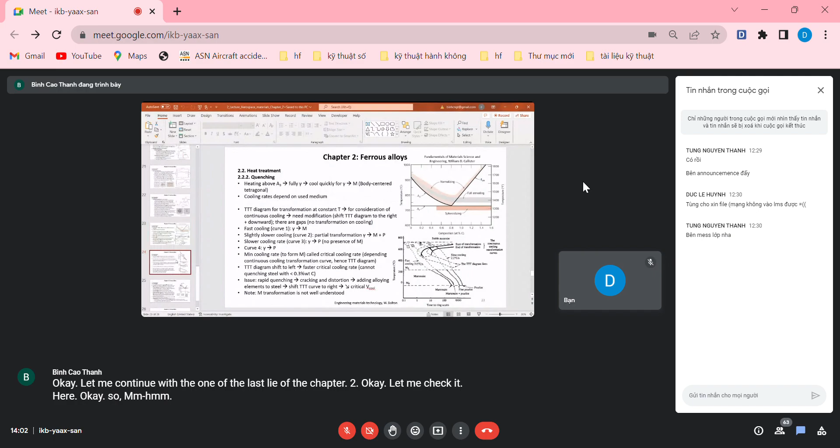Quenching, tempering, and carburizing. Carburizing, in Vietnamese, thấm carbon. The purpose of performing carburizing is to improve the carbon content of the surface layer, together with supporting the quenching process in order to form the martensite on the surface layer.

The reason is that for steel with carbon content smaller than 0.2%, there is no possibility to quench. Therefore, the idea is to create steel structures so that in the core of the material it is soft, has good ductility and a large percentage elongation.

However, on the surface, they would like to have something hard, with high hardness and the ability to withstand scratch and wear. In such a case, they apply carburizing for steel with smaller than 0.2% of carbon. After carburizing, the carbon content on the surface layer can reach 0.7 up to 0.8%, and the surface layer can be quenched to form martensite structures, which can significantly improve the wear resistance and strength of the surface layer.

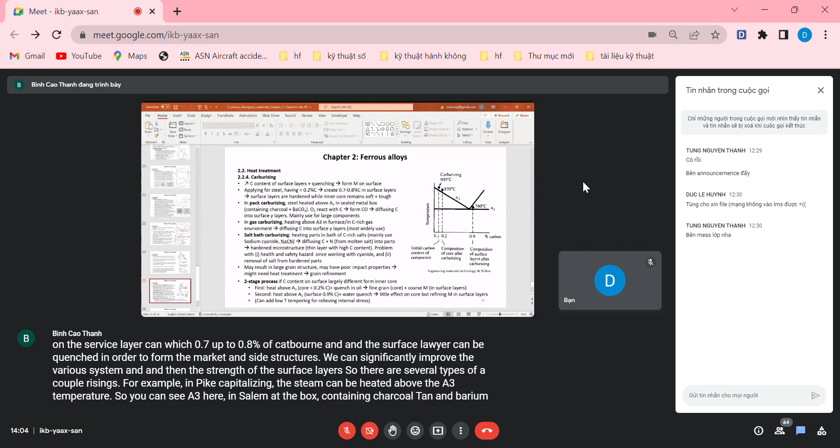So there are several types of carburizing. For example, in pack carburizing, the steel is heated above the A3 temperature, in a sealed metal box containing charcoal and barium carbonate. The oxygen reacts with the carbon to form carbon monoxide, which then diffuses carbon into the surface austenite layer.

This can be used for enhancing the carbon content on the surface layer of large components. Regarding gas carburizing, you heat the materials with steel having smaller than 0.2% of carbon above A3 temperature in furnaces or in a carbon-rich gas environment to promote the diffusion of carbon into the surface austenite layers.

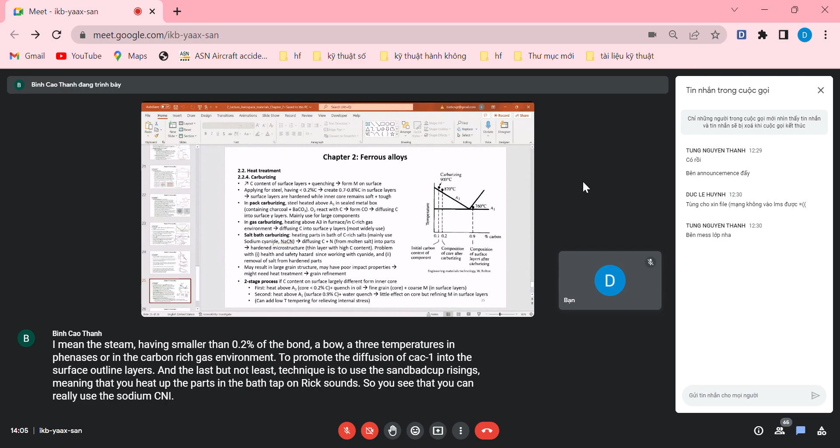The last technique is salt bath carburizing, meaning you heat the part in a bath of carbon-rich salts. You mainly use sodium cyanide, which is quite detrimental to human health, in order to promote the diffusion of carbon and nitrogen from the molten salt into the part, giving the positive effect of hardened microstructures with a thin layer of high carbon content. However, remember that you work with the cyanide group, so it's quite terrible for health, and you need to consider the safety hazards of working with cyanide.

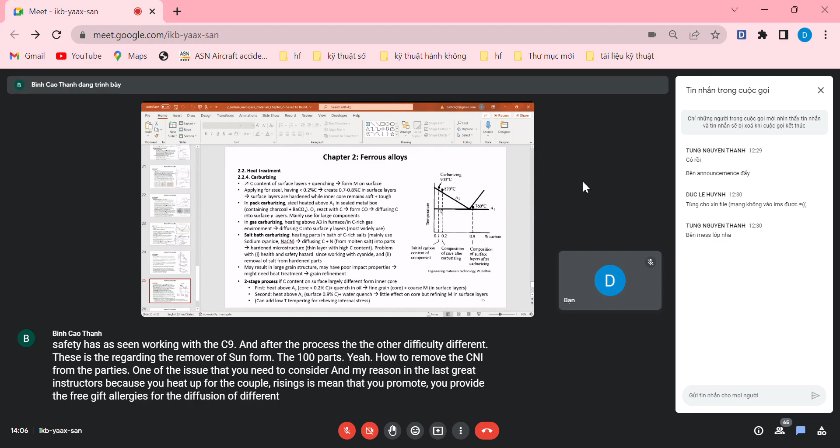After the process, another difficulty is the removal of salt from the hardened parts—how to remove the cyanide is one issue to consider. It may also result in large grain structures because heating for carburizing provides free energy for diffusion of different atoms, promoting grain growth and reducing the strength of the material. As a result, you may have poor impact properties, and you need additional heat treatment to refine the grains.

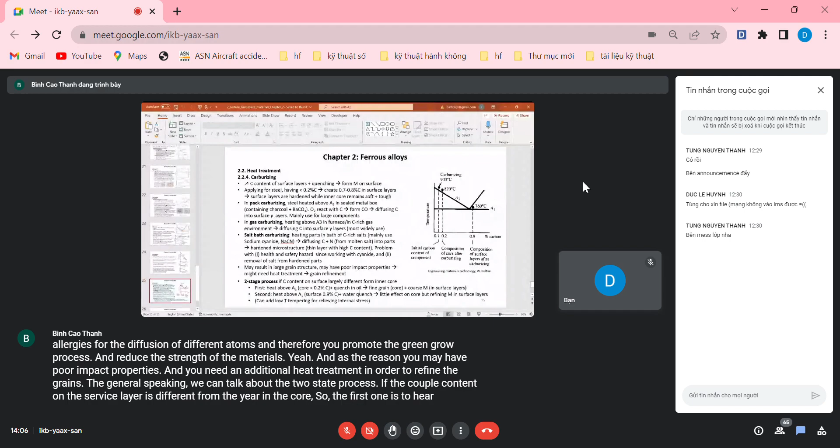Generally speaking, we can talk about a two-stage process, if the carbon content on the surface layer is different from the inner core. The first stage is to heat up above the A3 temperature. Remember that the A3 temperature is a line, and the specific temperature depends on the specific composition, or the amount of carbon content, so you have to consider the specific temperature.

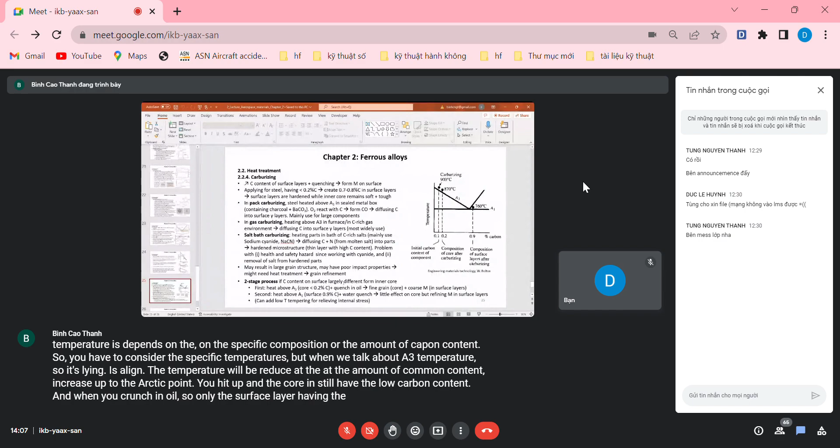The temperature will be reduced as the amount of carbon content increases up to the eutectoid point. You heat up, and the core will still have low carbon content. When you quench in oil, only the surface layer can be quenched, because it has carbon content larger than 0.3%—after carburizing, the carbon content on the surface layer can reach 0.7 up to 0.8% by weight.

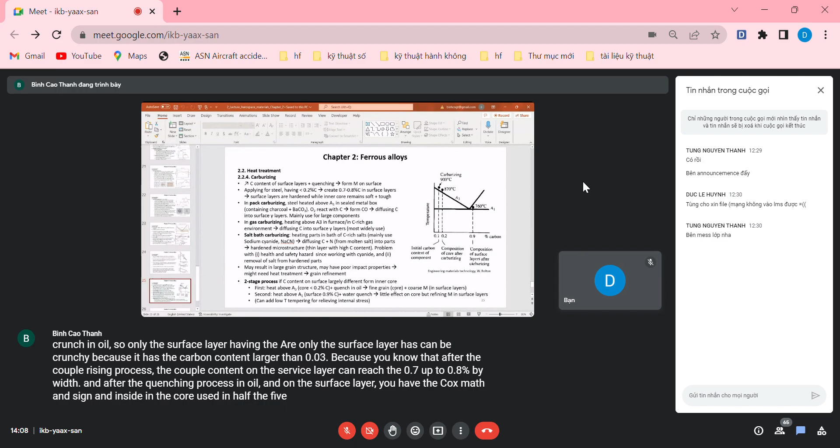After quenching in oil, the surface layer has coarse martensite, while inside the core you still have fine grain, because we do not quench the core. In the second stage, you heat up above the A1 temperature.

Because if you perform the carburizing and enhance the carbon content up to 0.9%, it means that after the eutectoid point, or hypereutectoid steel, in that case you just heat up above A1 and perform the water quenching process in order to refine the martensite on the surface layer. Afterward, you can perform the tempering process for relieving the internal stress. So that's what we can do with the carburizing process.

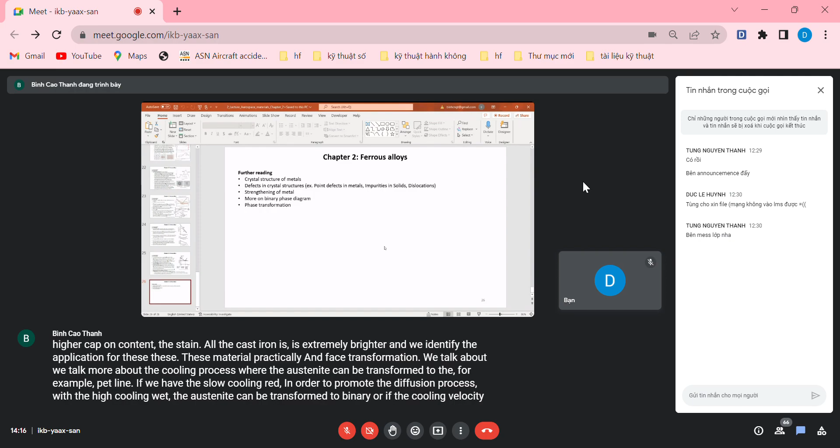And phase transformation - we talked more about the cooling process, where austenite can be transformed to, for example, pearlite, if we have a slow cooling rate in order to promote the diffusion process. With a high cooling rate, austenite can be transformed to bainite, or if the cooling rate is higher than the critical cooling rate, then we have transformation from austenite to martensite. Please remember, this process is not complete, and you have some kind of residual austenite after the transformation. Together with different kinds of heat treatment, we also talked about carburizing or nitriding, but nitriding was not mentioned here.

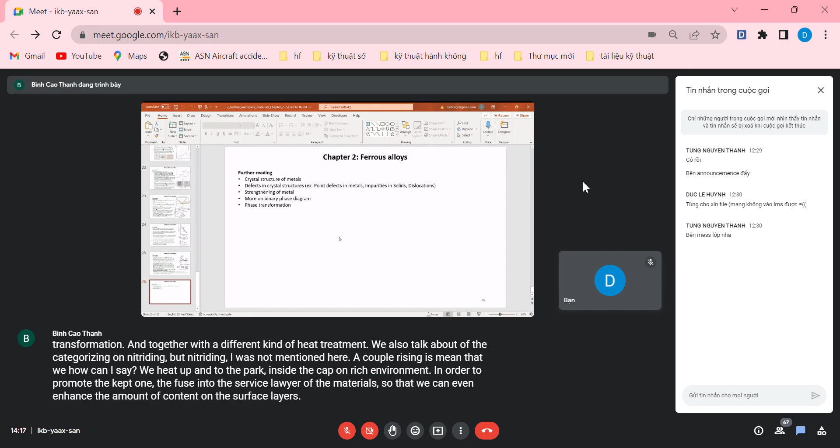Carburizing means we heat up the part inside a carbon-rich environment in order to promote carbon diffusion into the surface layer of the materials, so that we can enhance the amount of carbon content on the surface layers. In doing this, the surface layer has a high amount of carbon content, and generally speaking, is harder than the inner core of the material. So the surface part can resist wear well, wear resistant and scratch resistant, but the inner core is relatively ductile and has great percentage elongation and can withstand the impact load well.

Yeah, that's the point. Okay, so now I would like to stop the second chapter. If you do not have any other questions concerning the ferrous alloys, we can turn into the third chapter, where we will focus on non-ferrous alloys, for example copper alloy, aluminum alloy, nickel alloy, titanium alloy, and others.

Where is it? Sorry for all the edit.

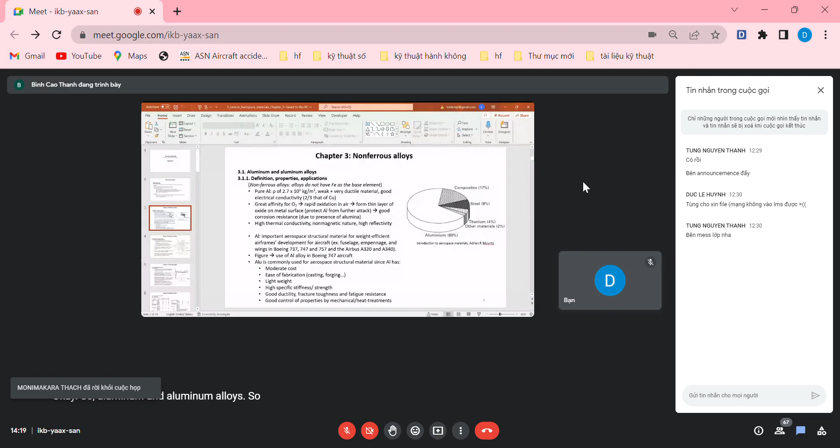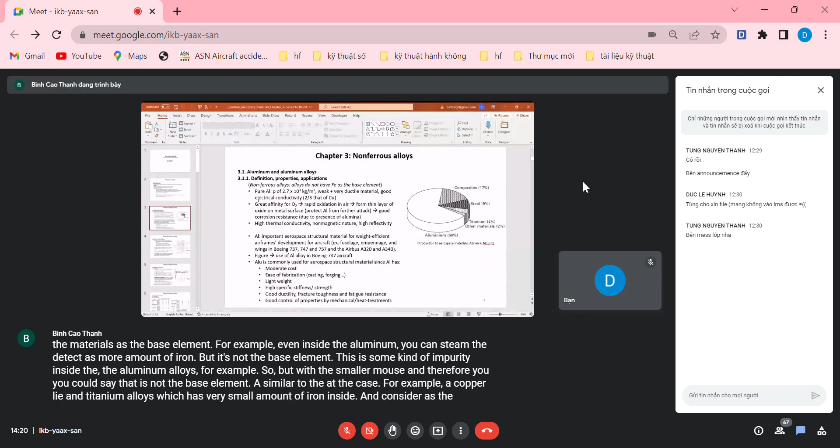So, aluminum and aluminum alloys. I think this is a popular material that almost all of you are familiar with, and we also study it in high school. When we talk about non-ferrous alloys, it means those alloys which do not contain iron as the base element. For example, even inside aluminum you can detect a small amount of iron, but it's not the base element, just some kind of impurity. Similarly, copper alloys and titanium alloys have a very small amount of iron, considered as impurities, not as the base element.

Concerning pure aluminum, the density is around 2.7 times 10 to the 3 kilograms per meter cubed. Aluminum is weak, very ductile material, and has very good electric and thermal conductivities. The electric conductivity of aluminum is equal to two-thirds that of copper.

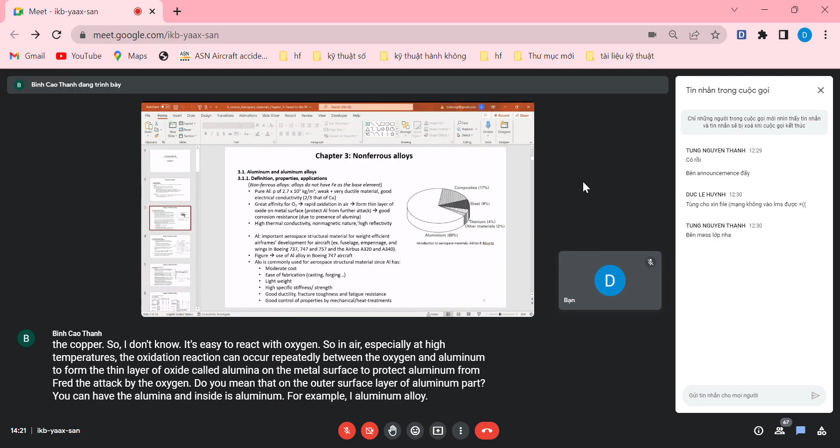Aluminum is easy to react with oxygen. In air, especially at high temperatures, the oxidation reaction can occur rapidly between oxygen and aluminum to form a thin layer of oxide called alumina on the metal surface, protecting the aluminum from further attack by oxygen. This means that on the outer surface layer of an aluminum part, you will have alumina, and inside is aluminum or aluminum alloy. So on the outside surface you have alumina, showing very good corrosion resistance.

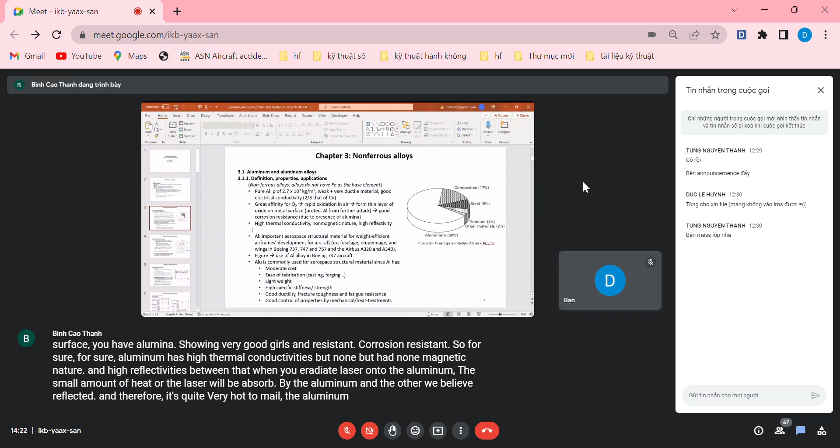Very good corrosion resistance. Aluminum has high thermal conductivity but has non-magnetic nature and high reflectivity, which means that when you irradiate a laser onto aluminum, a small amount of heat or laser will be absorbed and the rest will be reflected. Therefore it's quite hard to melt the aluminum material by laser because of high reflectivity, and that's one of the reasons it's a little difficult to sinter or additively manufacture aluminum alloys by additive manufacturing.

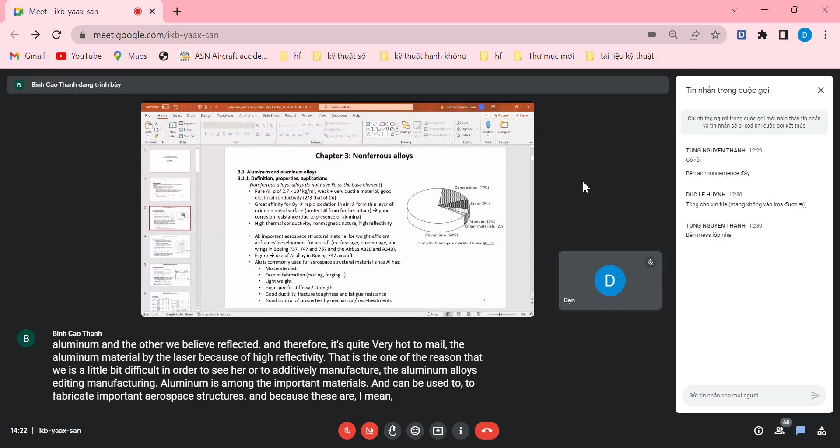Aluminum is among the important materials and can be used to fabricate important aerospace structures. I mean, not pure aluminum, but aluminum alloy, because it's light and has very good strength. This can be used to fabricate, for example, fuselage, empennage, and wings in Boeing 737, 747, 757, or the Airbus - quite famous airplanes, Airbus A320 or A340.

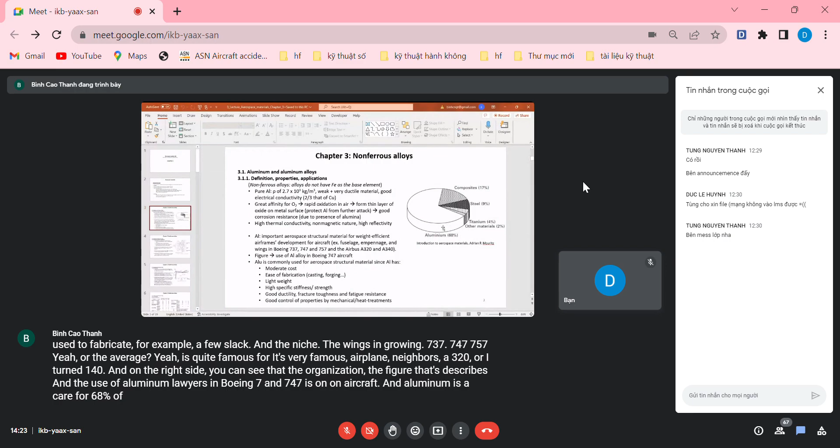On the right side you can see the figure describing the use of aluminum alloys in the Boeing 747 aircraft. Aluminum accounts for 68% of material on this aircraft. Composite accounts for just 17%, but now composite has increased up to 50%.

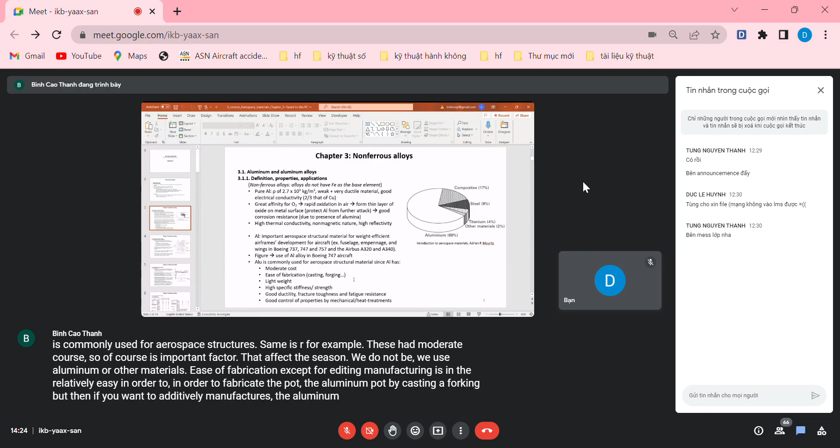The reasons aluminum is commonly used for aerospace structures are, for example, moderate cost - cost is an important factor affecting the decision of whether to use aluminum or other materials - and ease of fabrication, except for additive manufacturing. It can be relatively easy to fabricate aluminum parts by casting or forging, but if you want to additively manufacture an aluminum part, it's a little more difficult compared to other materials, since aluminum has high reflectivity.

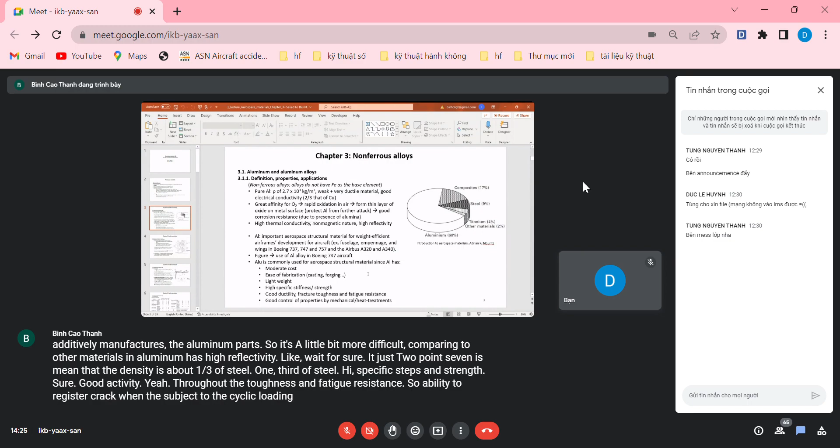Lightweight for sure - a density of 2.7 means it's about one third of steel. High specific stiffness and strength, good ductility, fracture toughness, and fatigue resistance - the ability to resist cracking when subjected to cyclic loading. And good control of properties by mechanical or heat treatment. With the development of technologies, we can achieve this for many metals, not only aluminum.

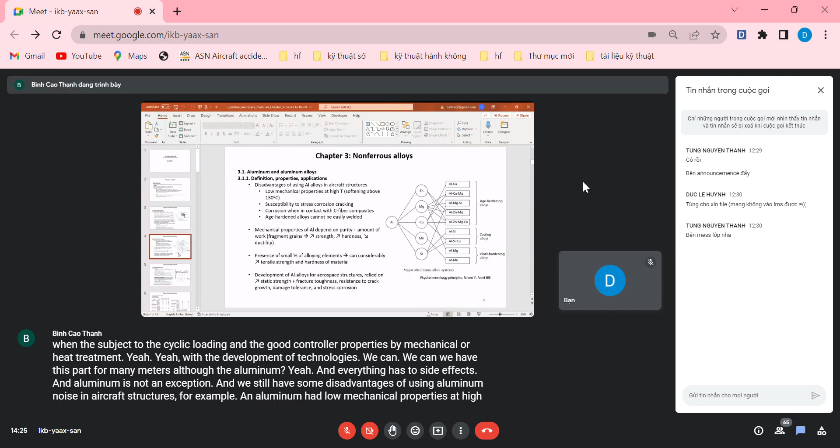And everything has two side effects, and aluminum is not an exception. We still have some disadvantages of using aluminum alloys in aircraft structures. For example, aluminum has low mechanical properties at high temperatures, because at high temperatures it can be softened, especially above 150 degrees C. Aluminum is also susceptible to stress corrosion cracking.

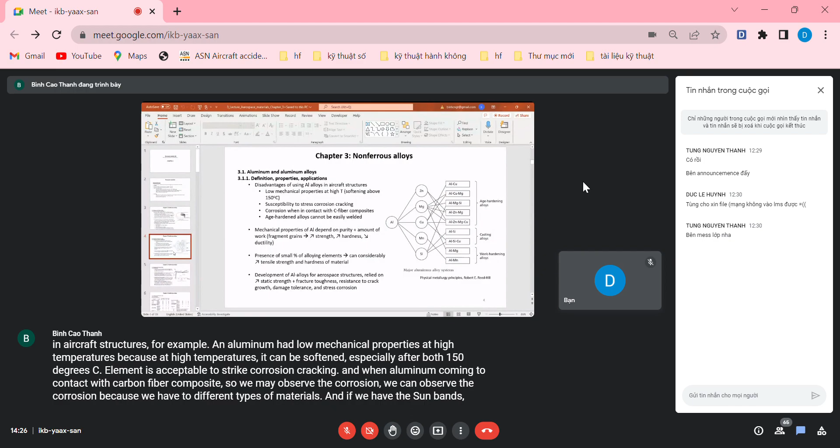When aluminum comes into contact with carbon fiber composite, we may observe corrosion, because we have two different types of materials. If we have solvents containing ions of two different metals, it can promote the corrosion process.

Age hardened alloy cannot easily be welded - these are the physical properties. But now we have different joining processes, not only welding processes, in order to join materials together. But generally speaking, this is one of the disadvantages of using aluminum alloys in aircraft structures - not easy to be welded, especially for age hardened alloys.

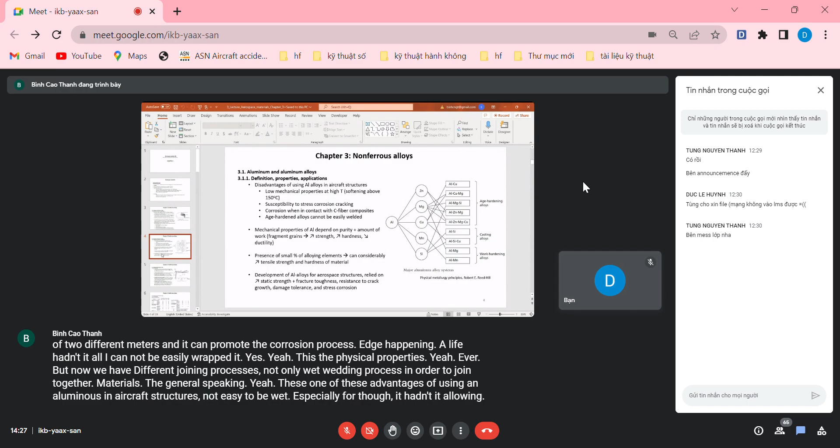So regarding aluminum alloys, you see that aluminum can be alloyed with different metals, for example zinc, magnesium, copper. Aluminum-copper is quite famous, age hardening alloys.

For example, as a part inside the ferrous alloy steel, we have talked about precipitation hardening. I took one example, not regarding steel, but precipitation hardening, showing you the aluminum alloy with 4% of copper.

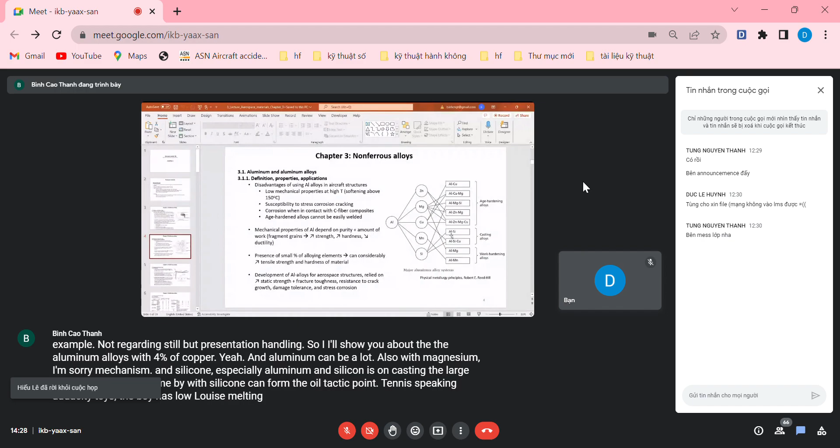Aluminum can also be alloyed with magnesium, manganese, and silicon. Especially aluminum and silicon is called casting alloy because aluminum combined with silicon can form the eutectic point. Generally speaking, the eutectic point is the point with lowest melting temperature, so it's very easy to cast because you need lower energy to heat up the material up to the molten state.

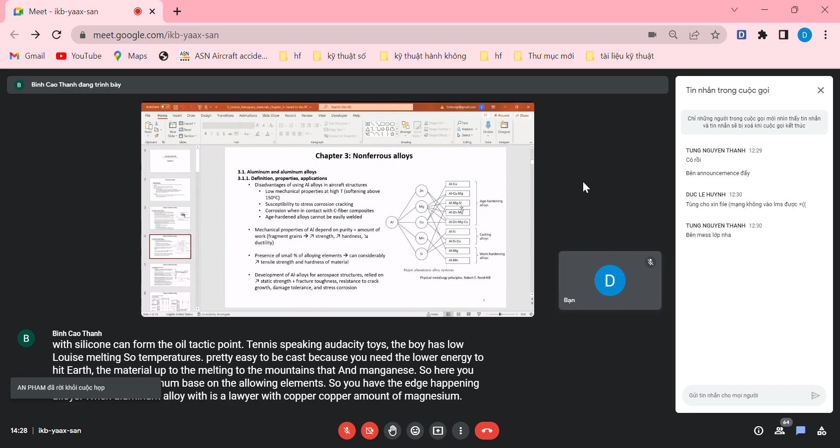And manganese. So here you can also classify aluminum based on the alloying elements. You have the age hardening alloys when aluminum is alloyed with copper, or magnesium and silicon, or zinc and magnesium, and so on. On the next few slides we will talk about the classification for aluminum and aluminum alloys.

Mechanical properties of aluminum for sure depend on purities. When impurity occurs, it really affects the mechanical properties of aluminum, but it depends on the specific alloying element.

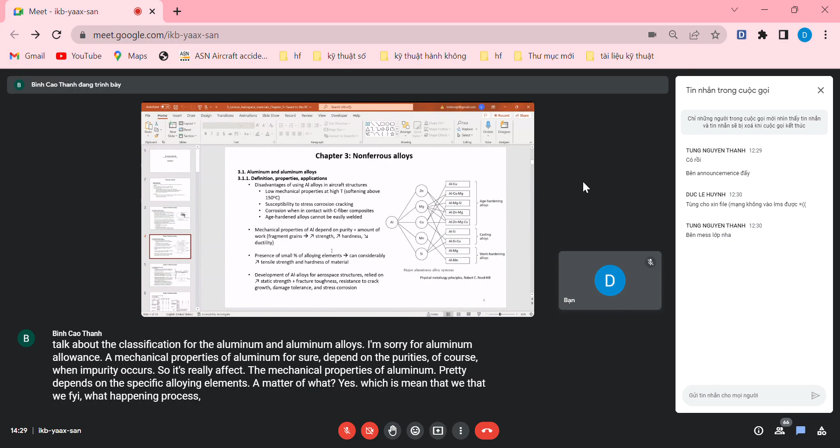Amount of work, yes - it means whether we apply the work hardening process or not. Generally speaking, once you have the work hardening process, you can break the large grain to form small grains. The number of grains is increased, meaning you have increased the grain boundary regions, and therefore you improve the strength and hardness.

But on the other side, you reduce the ductility of the material. That's why I always ask you to be careful, because you need to find the trade-off between the hardness, the strength, and the ductility.

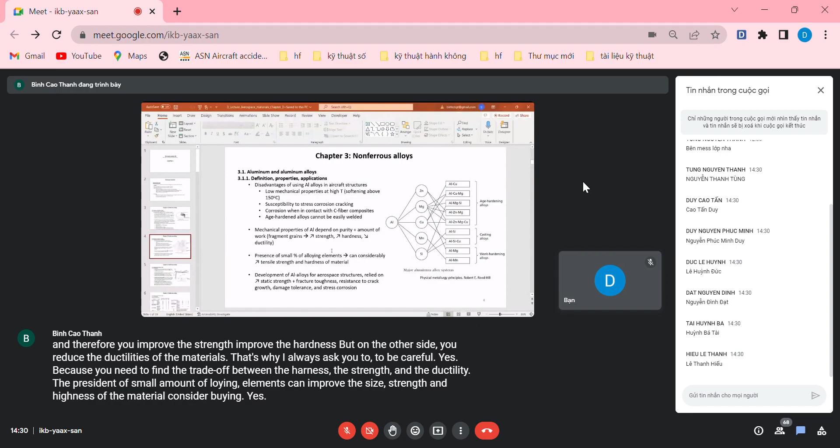The presence of a small amount of alloying elements can improve tensile strength and hardness of the material considerably. So this is the effect of adding alloying elements - even a small amount can significantly modify the properties of the material.

The development of aluminum alloys for aerospace structures relies on the strength - improvement of static strength, fracture toughness, resistance to crack growth, damage tolerance, and stress corrosion.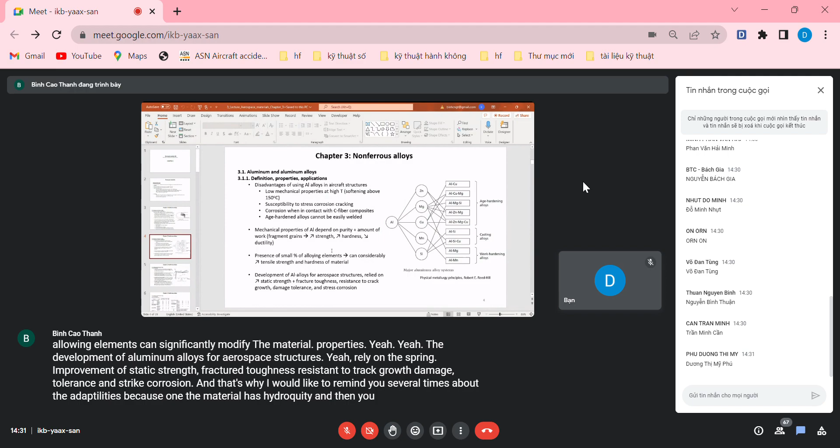That's why I would like to remind you several times about the ductility, because when the material has high ductility, you can have good damage tolerance, because when the impact force is applied to the part, the part can be deformed.

Once the airplane lands, you can change the part. So it means the part can work for a certain period of time before replacement. But if it does not have damage tolerance, it means that under the influence of the impact force, the part is suddenly broken down.

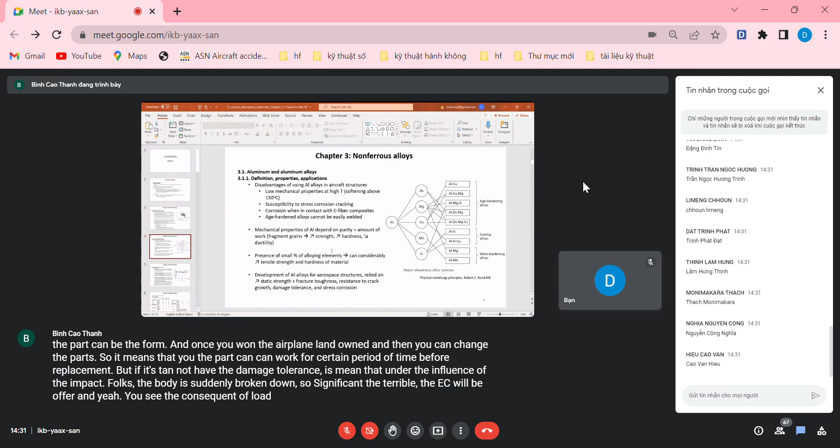A significant, terrible issue will occur. You see the consequence of low damage tolerance - fracture will occur immediately and block the engine, for example. What happens afterward? And stress corrosion.

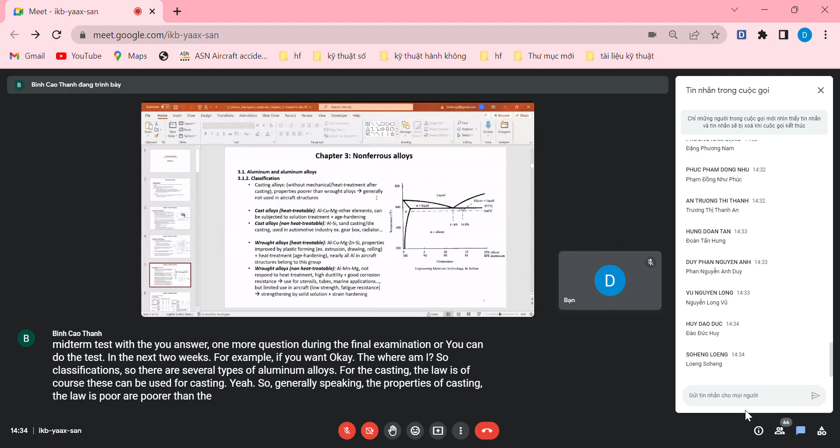So classification: there are several types of aluminum alloys. For casting alloys, these can be used for casting. Generally speaking, the properties of casting alloys are poorer than wrought alloys. We do not use aluminum casting alloy for aerospace structures because it has poorer mechanical and even chemical properties compared to wrought alloys, and poor surface quality as well. But they are grouped among the other types of aluminum alloys, so we need to know them.

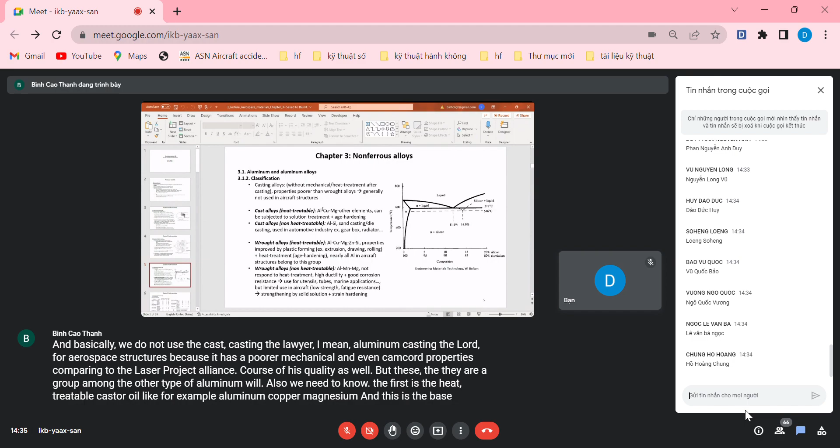The first is the heat treatable cast alloy, like aluminum, copper, magnesium, and these are the base elements. But we can add other alloying elements as well, and it can be subjected to solution treatment and age hardening.

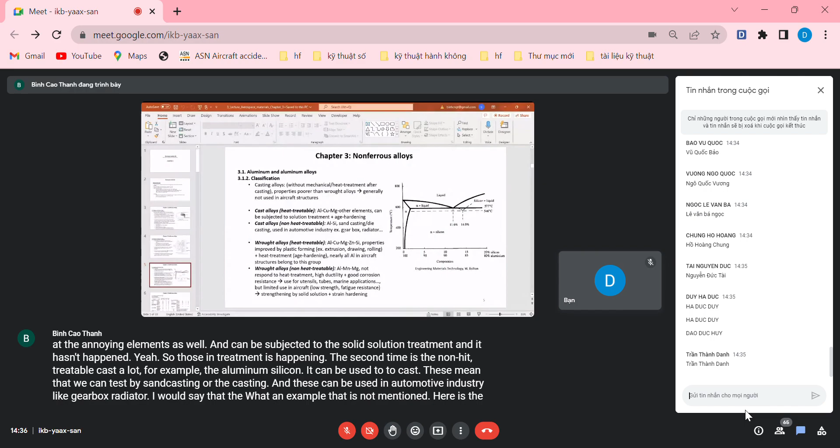The second type is the non-heat treatable cast alloy, for example aluminum silicon. It can be used to cast by sand casting or die casting, and can be used in the automotive industry like gearbox, radiators. An example not mentioned here is the piston head, which is made of aluminum silicon. Piston head, radiator (hộp tản nhiệt), gearbox (hộp số).

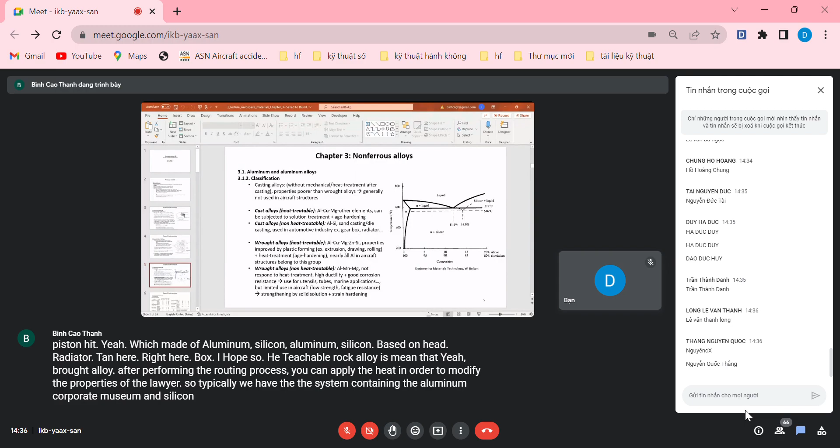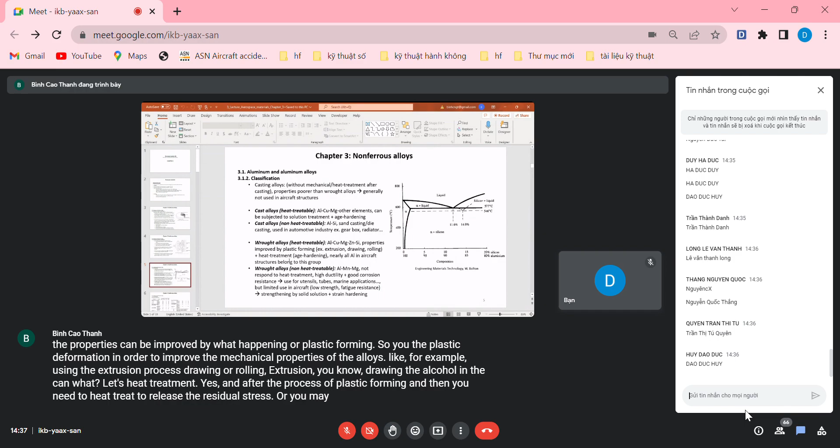The heat-treatable wrought alloy means that after performing the wrought process, you can apply heat in order to modify the properties of the alloy. Typically we have the system containing aluminum, copper, magnesium, zinc, and silicon. The properties can be improved by work hardening or plastic forming, using plastic deformation to improve mechanical properties, like extrusion, drawing, or rolling (extrusion, kéo qua, cán cuộn), plus heat treatment. After the process of plastic forming, you need to heat treat to release residual stress, or you may form precipitates to increase the strength and performance of the materials. Nearly all aluminum in aircraft structures belongs to this category, the heat treatable wrought aluminum alloy.

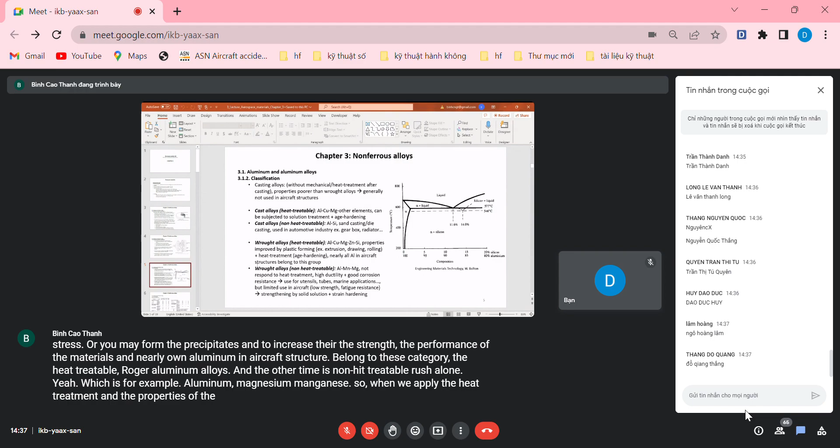The other type is non-heat treatable wrought alloy, for example aluminum, magnesium, manganese. When we apply heat treatment, the properties of the wrought aluminum alloys almost do not change. This type of alloy has high ductility, good corrosion resistance, and with these properties, non-heat treatable wrought alloys can be used for making utensils, tubes, or other marine applications.

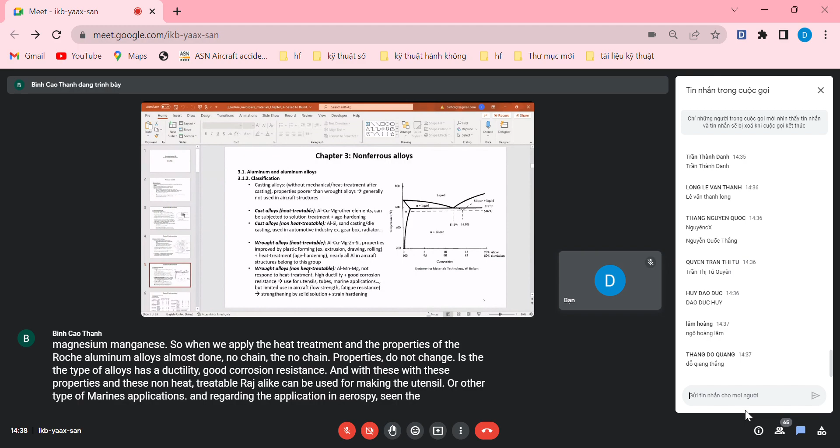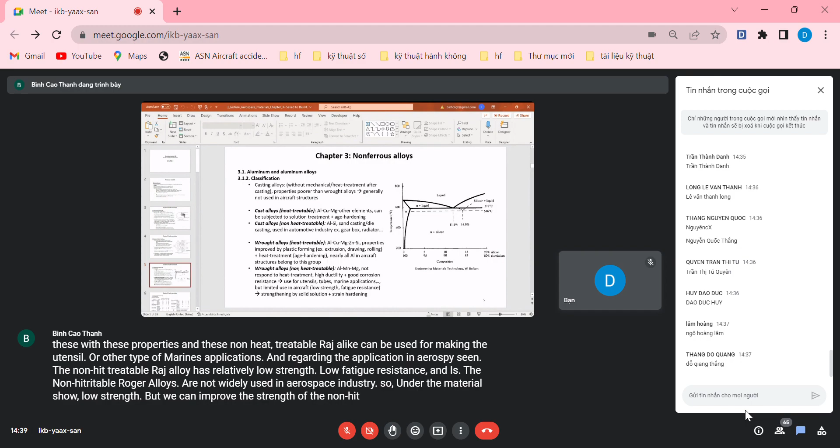Regarding application in aerospace, since the non-heat treatable wrought alloy has relatively low strength and low fatigue resistance, these alloys are not widely used in the aerospace industry. Although the material shows low strength, we can improve the strength of the non-heat treatable wrought alloy, not by heat treatment, but by solid solution strengthening or strain hardening.

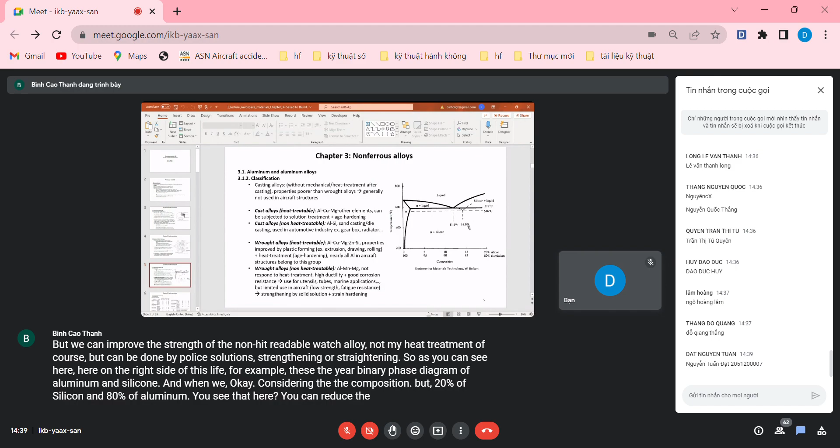As you can see on the right side of this slide, this is the binary phase diagram of aluminum and silicon. When we consider the composition of 20% silicon and 80% aluminum, you see here that you can reduce the temperature of the eutectic point, and therefore you save energy for heating the material up to the molten stage for the casting process.

This is because aluminum silicon is the cast aluminum alloy, but actually we have many cast alloys. It depends on the specific composition that can be used, for example 1% silicon, 99% aluminum, and others.

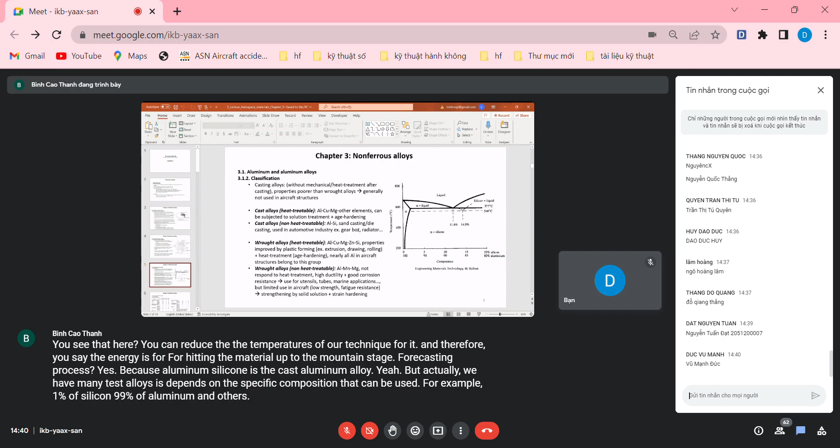So here you could see the table. I just divided the table into two parts so that it can fit into the slides. This shows the typical properties of different aluminum alloys based on the classification we have dealt with. We have the composition, the conditions - condition means different heat treatment processes can be applied in order to modify the properties, for example tensile strength, percentage elongation, or the hardness of the materials.

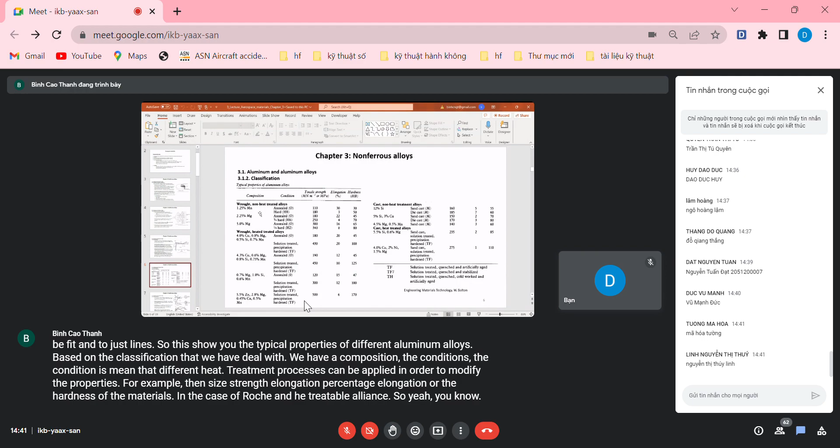In the case of wrought, non-heat treatable alloys, we alloy with manganese or magnesium with a certain composition, and we can use the anneal process. Anneal means quá trình ủ, but during the second chapter we do not focus on the annealing process for steel, but you can read it at home if you are interested.

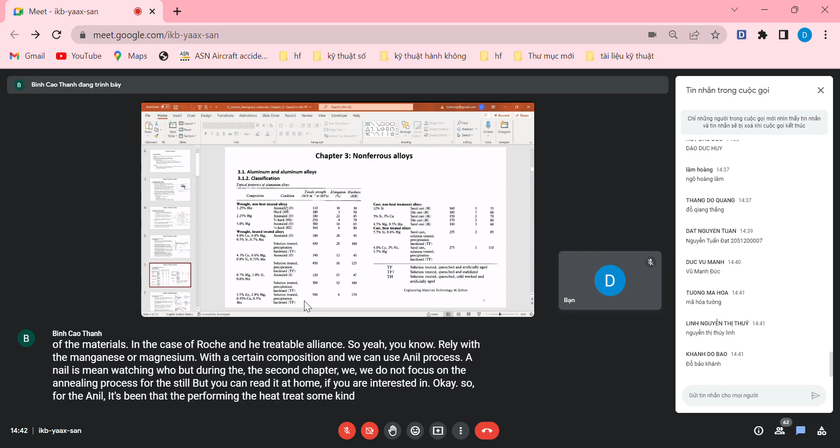So for annealing, it means you perform heat treatment, some kind of heat treatment, and you do not have a significant effect because this is a non-heat treatable alloy. It means that even if you apply heat treatment, if the strength is not improved, why should we apply it? It wastes money, time, and effort of the technician.

And hard, you can improve with H8. You can improve the tensile strength, but then you reduce the elongation percentage. That's what you need to balance.

And you can have the precipitation hardening process, which can significantly improve tensile strength. With respect to the case of non-heat treatable wrought alloy, that's why heat treated wrought aluminum can be used for the aerospace industry, because it's almost 4 times higher than the tensile strength of non-heat treated wrought alloys.

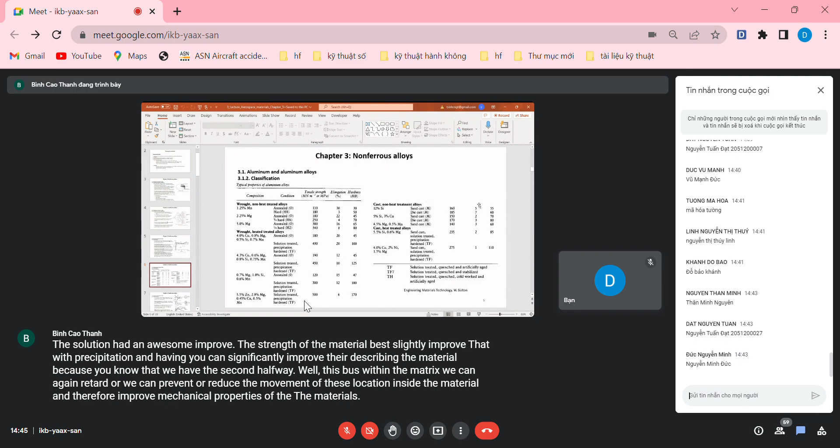You can even alloy with nickel, so 2% nickel, 4% copper, and 1.5% magnesium. It's quite interesting to know about this, because 2% nickel is not high, but this is an expensive material, so that's why I'm interested.

So let's talk a little bit more about heat treatment for aluminum and aluminum alloys. When we talk about heat treatment, we pay more attention to the group of heat treatable wrought alloys, because they can be used for the aerospace industry, and by using heat treatment we can improve the properties of these materials. So aluminum and copper, for example...

especially duralumin, with 4% copper, 0.8% magnesium, 0.5% silicon, and 0.7% manganese, with the balance being aluminum, so that we have 100% by weight of the material. This material is widely used in aircraft bodywork, and for the heat treatment there are several steps, including solution heat treatment, quenching, and aging.

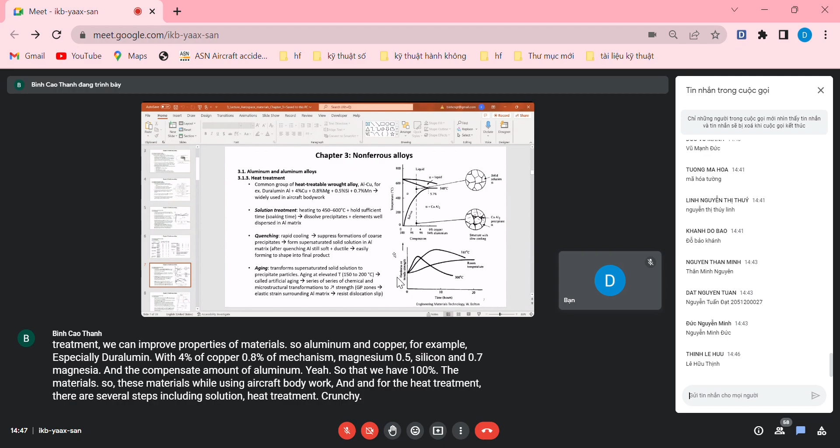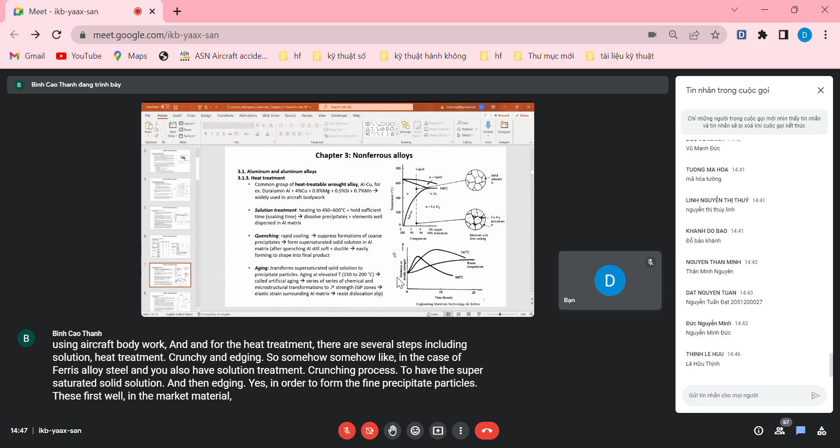So somewhat like in the case of ferrous alloy steel, you also have solution treatment and quenching process to have a super saturated solid solution, and then aging, in order to form fine precipitate particles dispersed well in the matrix material and improve the mechanical properties of such a material.

So for the specific duralumin material, for the solution treatment we need to heat up the material up to 600 degrees C, typically within the range of 450 up to 600 degrees C. We hold for long enough time to dissolve the alloy elements or precipitates in the aluminum matrix, so as to have a fully single-phase structure.

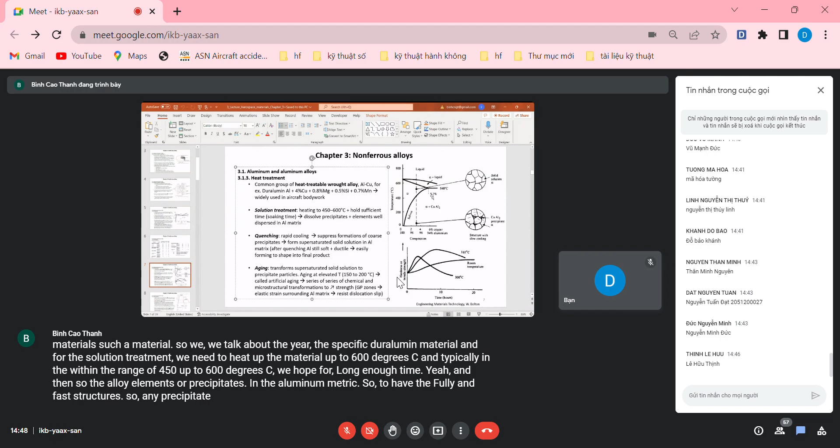So any precipitate like the theta phase, copper aluminide, will be dissolved, so as to have a fully single-phase structure.

And then you maintain it for a certain period of time so that the dissolving process happens completely. Once the dissolving process is completed, you can perform the rapid cooling step in order to quench the material. This means you rapidly cool down the material at these temperatures in order to form a supersaturated solid solution of copper inside the aluminum matrix.

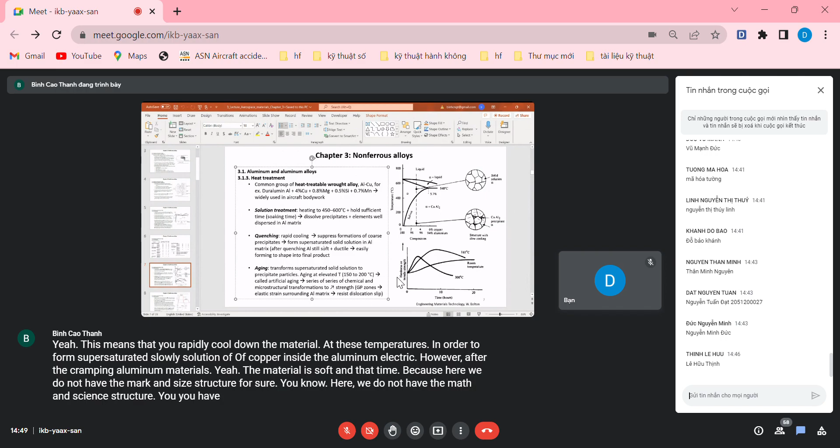However, after quenching aluminum materials, the material is soft and ductile, because here we do not have the martensite structure like in steel. Martensite is the supersaturated solid solution of carbon inside the ferrite. But here, in duralumin, you only have aluminum and copper, or the theta phase. Therefore, after quenching, duralumin is still soft and ductile.

At this stage, we do not let the part work yet. I mean we subject the part to the manufacturing process in order to shape it. This is a good time to do so, because it's soft and ductile, making it easy to form into the final product. Afterwards, we perform the artificial aging process to improve mechanical properties and strength.

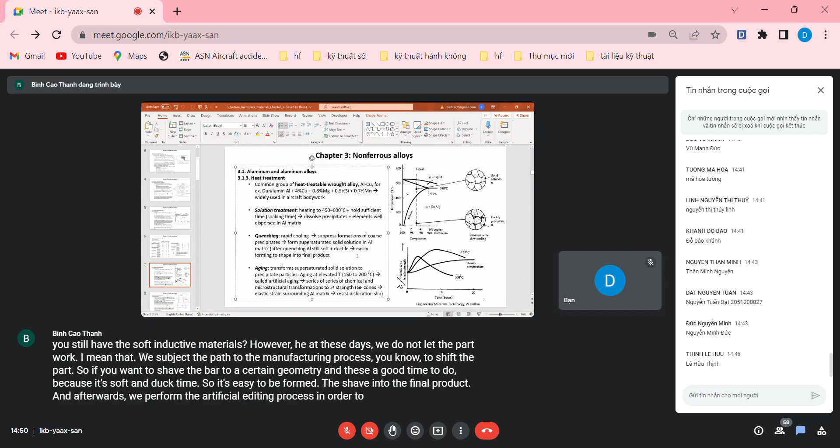The aim of the aging process is to transform the supersaturated solid solution into precipitate particles. The particles here are typically copper aluminide, CuAl2. This can be done by heating the quenched material up to 200 degrees C, typically in the range of 150 to 200 degrees C.

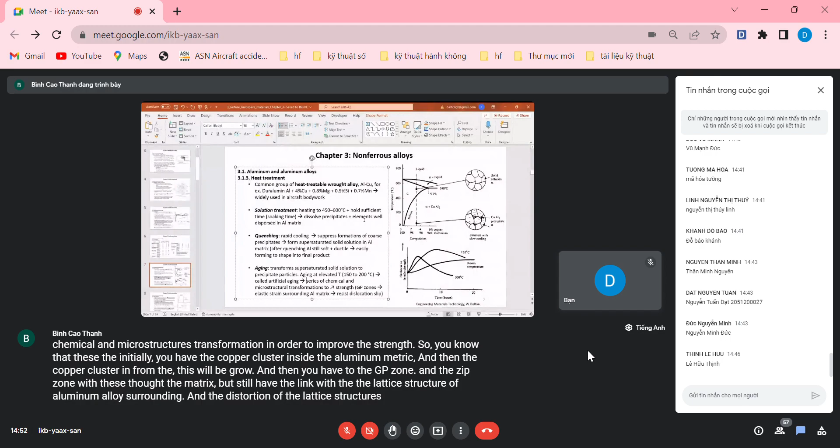Here I've noted a series of chemical and microstructural transformations that improve strength. Initially you have copper clusters inside the aluminum matrix, and these clusters grow to form the GP zone. The GP zone distorts the matrix but still maintains coherency with the lattice structure of the surrounding aluminum alloy, and this lattice distortion improves the strength of the material, up until the point we reach the incoherent precipitate. This means the precipitate no longer shares the lattice structure with the surrounding aluminum, and in that case we have a reduction in strength.

So once we have the GP zone, it places elastic strain on the surrounding aluminum matrix and prevents the movement of dislocations, resisting dislocation slip, and therefore improving the mechanical properties of the duralumin.

So here we can see the effect of changing aging temperatures on the properties of aluminum alloys. When you perform natural aging at room temperature, the time needed to enhance the properties of the aluminum alloy is pretty long, so it takes more time to enhance the properties.

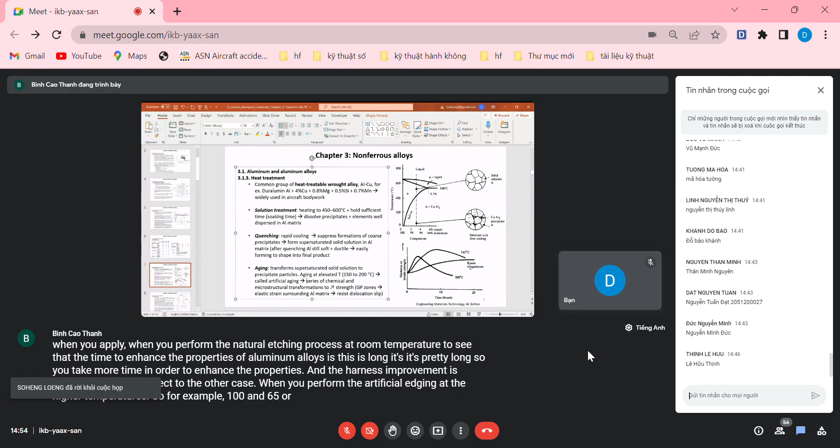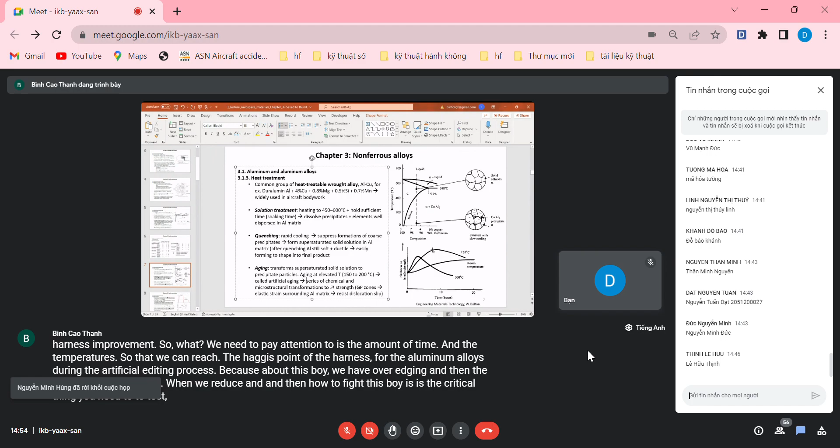So what we need to pay attention to is the amount of time and the temperature, so that we can reach the highest point of hardness for the aluminum alloy during the artificial aging process. Above this point, we have over-aging, and the strength or hardness will be reduced. How to find this point is a critical thing; you need to test, you need to perform experiments to find this point for a certain material.

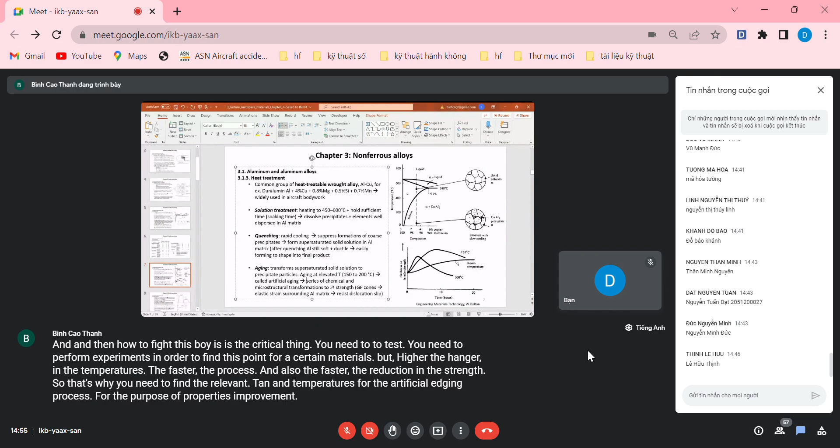The higher the temperature, the faster the process, but also the faster the reduction in strength. So that's why you need to find the relevant time and temperature for the artificial aging process, for the purpose of improving the properties of aluminum alloys.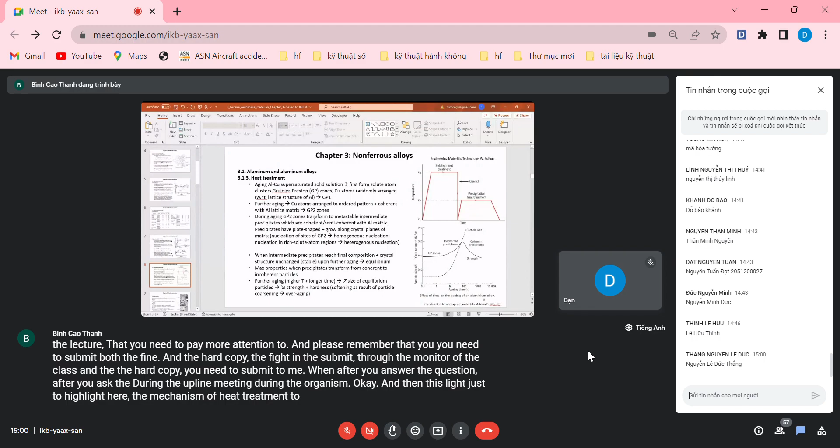Okay, this slide just to highlight the mechanism of heat treatment to promote the precipitation hardening process. So here you have, remember that you perform the solution heat treatment in order to create the complete alpha phase, and then you quench in order to perform the supersaturated solid solution of copper inside aluminum matrix, and then you shape the part before you perform the second step of heat treating, called artificial aging process.

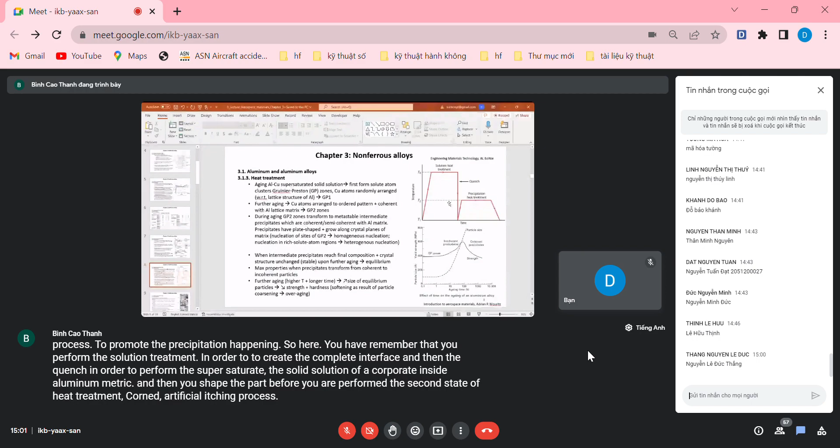And at the beginning of the artificial aging process, you will have the formation of the cluster zone, or the Guinier-Preston zone. It means that the copper atoms will be arranged randomly in the lattice structure of aluminum, and we call it GP1, or theta double prime. Let's go like this.

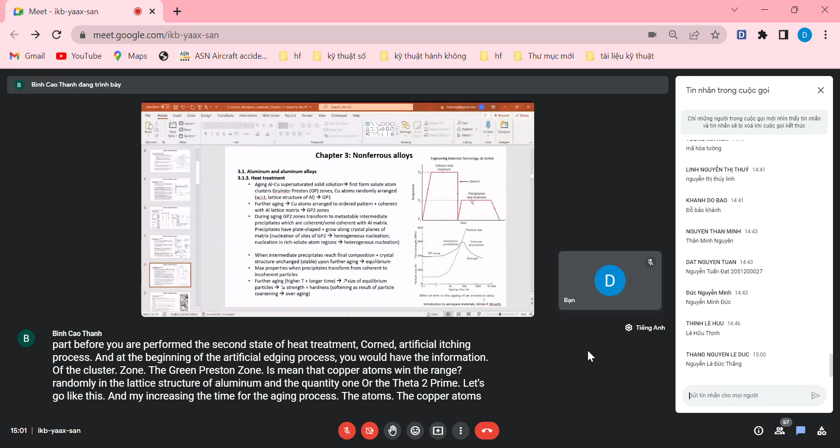And by increasing the time for the aging process, the copper atoms will be arranged in an ordered pattern, but still have the connection with the aluminum matrix, and we call it coherent with the aluminum matrix. In such case, we still have the theta 2 prime.

And we have the reduction of the strength only. I think something is inverse because coherent is here and incoherent is here. Yeah, I see some issue here.

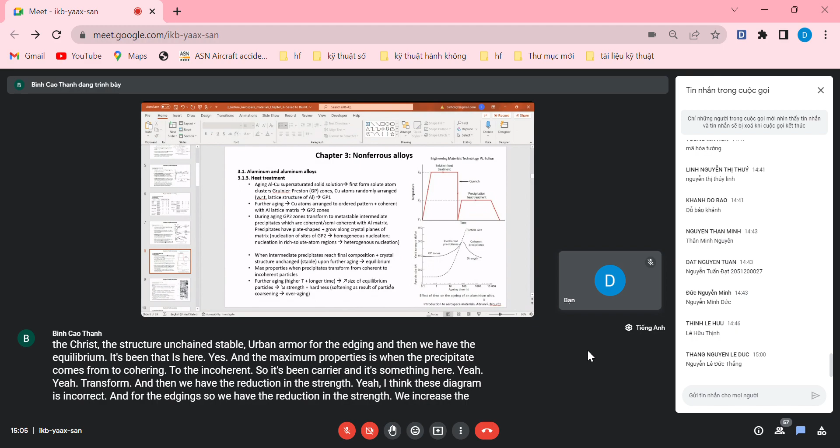The large grain size means that you have a reduction in strength and hardness. And resulting in the softening when the over-aging occurs. Yeah, correct.

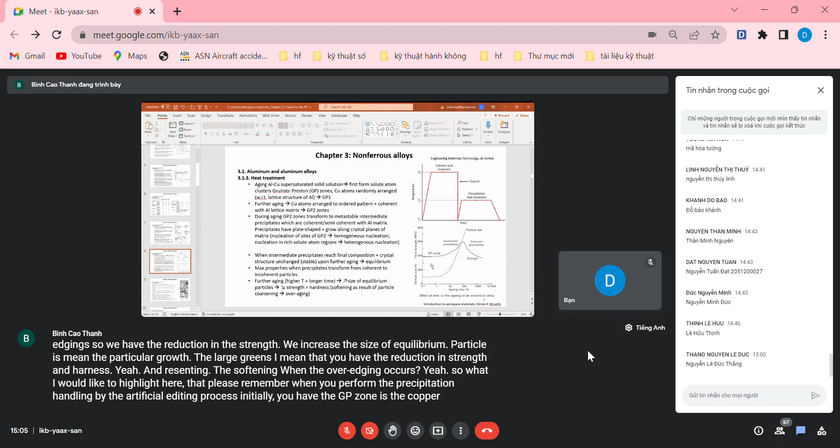So what I would like to highlight here is that when you perform precipitation hardening by the artificial aging process, initially you have the GP zone. It's the copper atom cluster forming a disk of copper atoms inside the aluminum matrix.

This distorts the lattice structure of the surrounding aluminum matrix, and then we improve slightly the strength of the material. But once the GP zone grows, we have the precipitate grain, but the grain is still coherent with the lattice matrix and distorts the aluminum matrix, giving considerable enhancement of the strength up to the maximum point here.

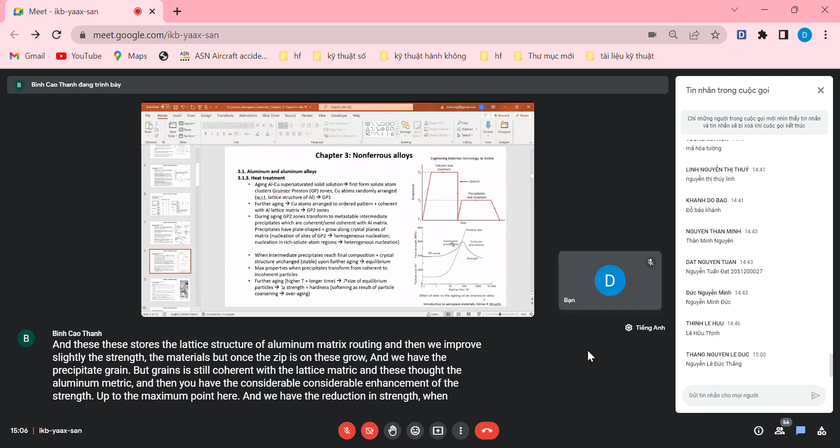And we have the reduction in strength when the precipitate becomes incoherent with the surrounding matrix. So just changing the position of coherent and incoherent here on the bottom right side of the slide. Therefore, it's critical to stop the aging process once you have the coherent precipitates in order to have the maximum strength of the material. That's what I would like to say.

Yes, let me check again. I think here, this is here. Yeah, this means coherent, so you have the connection between the theta 2 prime phase and the surrounding aluminum matrix, and incoherence means that you do not have the lattice linking. Yeah, it's somehow here, you have coherent here and incoherent here. Please remember that.